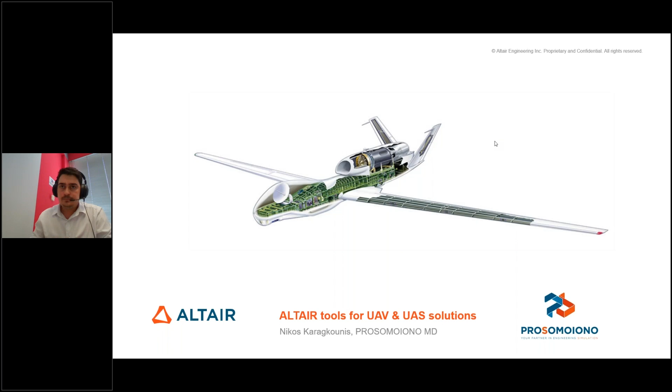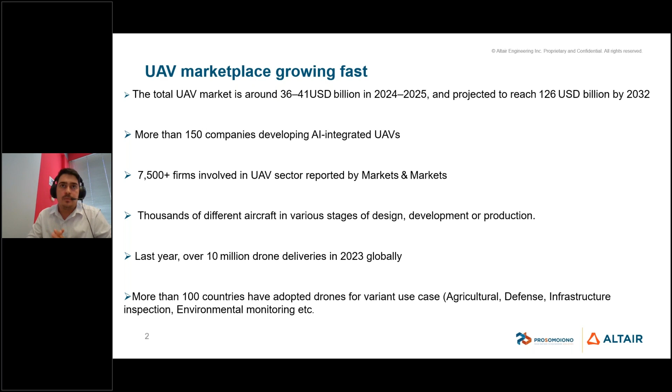Let's start with the bigger picture about the global UAV market, which is currently about 36 to 41 billion and forecasted to triple by 2032. Over 7,500 companies are operating in the field, with more than 150 focusing specifically on AI-driven systems. UAV technology is no longer confined to niche applications. Over 100 countries are now integrating drones across diverse sectors like agricultural, defense, infrastructure monitoring, environmental, and more. Last year, over 10 million drone deliveries were successfully completed worldwide. This isn't just a growing market, it's a market transforming at a scale and a speed.

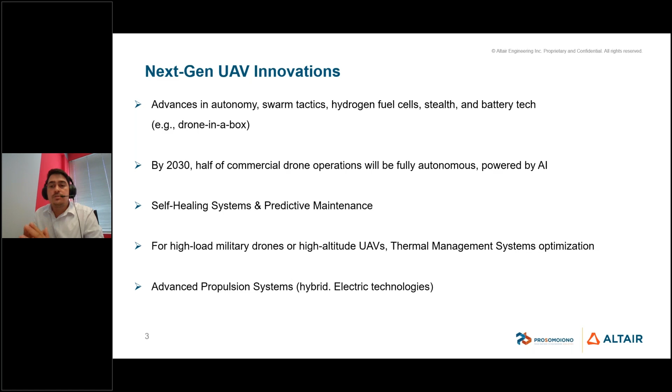The next generation UAVs are rapidly evolving with advanced technologies like hybrid propulsion, AI-based autonomy, and morphing airframes. This innovation introduces complex performance challenges that can only now be solved through sophisticated engineering simulation techniques. From fluid dynamics and thermal modeling to digital twins and swarm behavior prediction, simulation is now essential in the UAV development process.

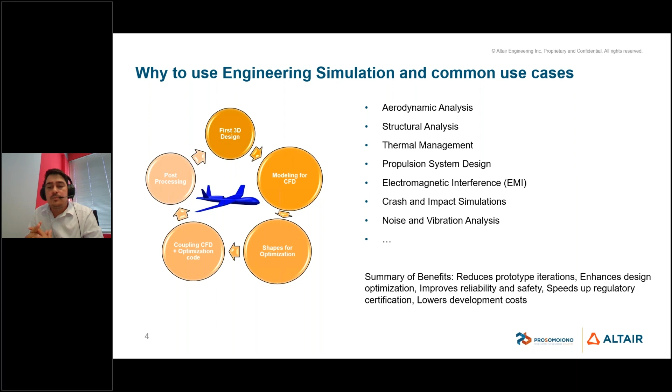This slide highlights how many use cases, pain points, and scenarios you can predict with the right engineering simulation tool to avoid failures and costs, and improve your products. But of course, simulation alone is not enough. What truly makes the difference is a robust engineering process, the right expertise, and the right technology partner like Altair and Prosomoiono who understand your business and guide your team in every step.

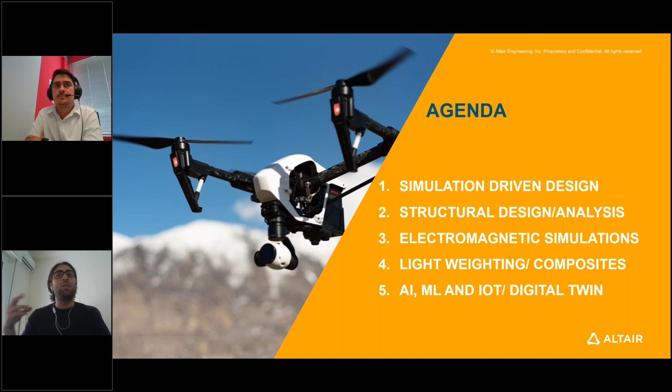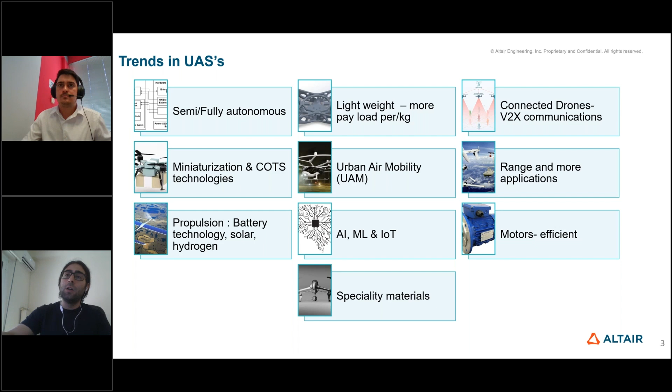On the other hand, all these systems are very complex and require advanced modeling in order to study them deeper. Versatility is another aspect that always has to be acknowledged, like when we want to increase the range of a drone, but we don't want to compromise our safety or the payload, another aspect of its performance. So, the role of simulation.

A common question is when to simulate and what to simulate. These four pillars, I believe, are the most appropriate ones. Design - we have to include simulation within the design process early on in the product life cycle, in order to get the information and know in which direction we have to go to make our product better. Then there is verification, of course. In this type of system, we have to follow rules and pass some tests, some validation cases.

Another important aspect is manufacturing, how we are going to build this product, how we're going to do the fabrication. Is it feasible? Is it sustainable? This is a very common issue that we don't see until the end of the design. And then there is, of course, operation, in which we see the performance of what we design, what we built, and simulation is a critical point as well for this stage.

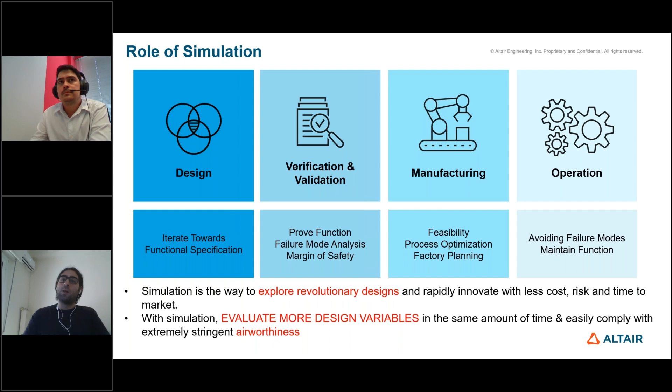Now, I talked about the design-driven simulation, where the typical design process includes the development concept and then the detailed design. This can be troublesome, prone to errors, and this is what Altair offers: the simulation-driven design. We have to do our optimization, our manufacturing, our structural analysis all together within the design process in order to speed up and to be more sustainable, in order to go to a prototype, validate it, and go to production.

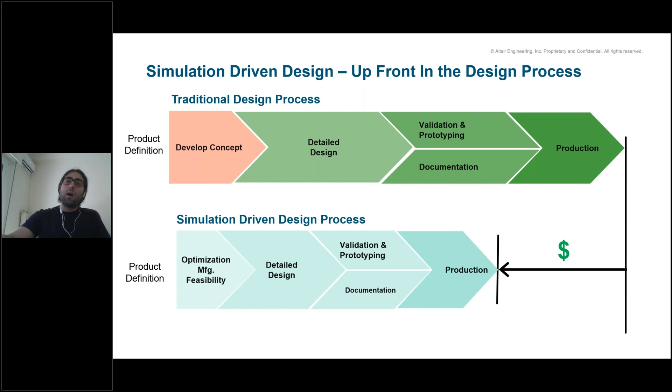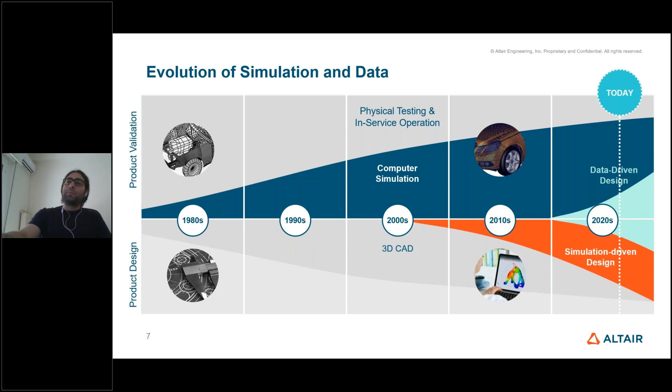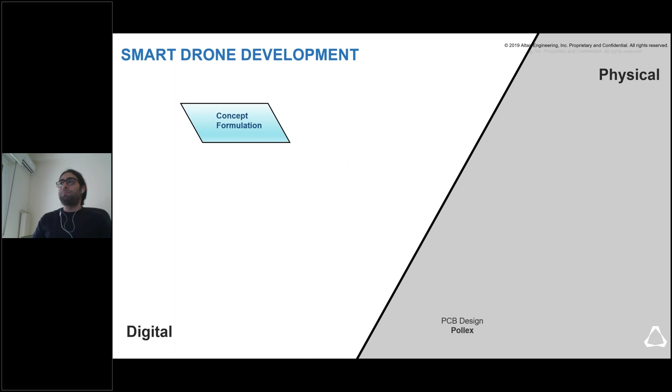Now, if we want to do an overview of how a smart drone development would look like, we have the physical space, and then we have the digital space, where we start from the concept formulation. We try our ideas, see what they go as, and then as a simulation-driven design, we include all the simulation, all the physics at this point in order to go to the detailed design.

As you can see, there are a lot of physics involved, a lot of software usually involved, but the goal is to achieve our aim, not how many tools we're going to use or how many physics are involved. Then after the detailed design comes the product release, the manufacturing, the validation of our product, some physical tests in order to see what we fabricated. And then there is the first feedback we get from what we designed to what we fabricated.

But the cycle doesn't have to stop at this point. We can go further, and until the end of life of this product, we have digital twins, we have hardware in the loop, simulation in the loop. There are a lot of other aspects to take into account.

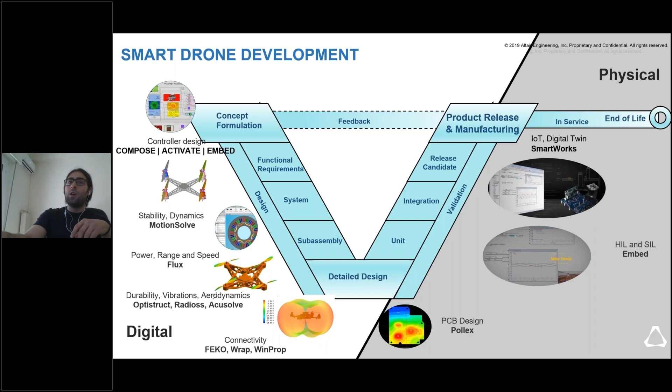Before we go deep into 3D modeling, structural analysis, CFD, hot topics, of course, we're doing some math, some system level simulation. For example, in this scenario, we have from electronic circuit to motor dynamics to multibody dynamics to some control systems in a schematic.

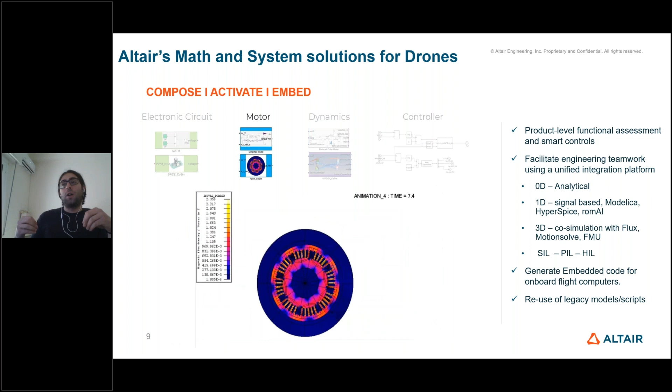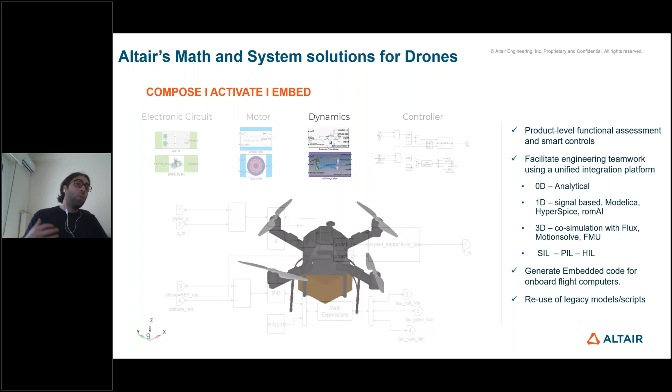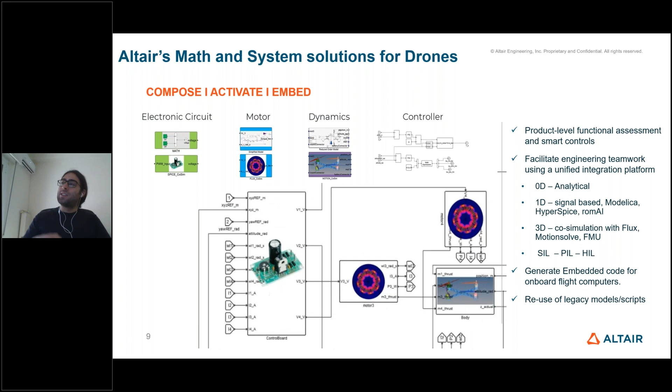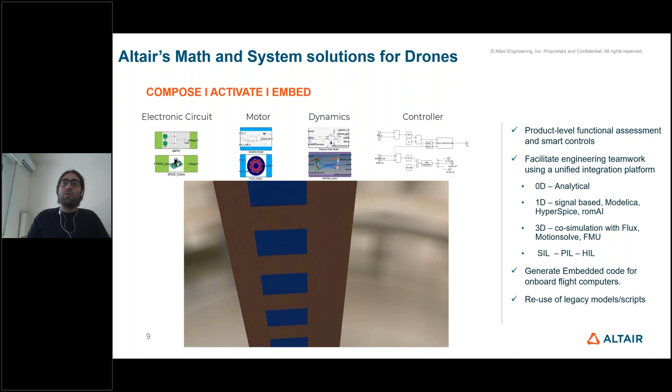All of this can be translated into a co-simulation within Altair in order to produce a scenario. In this case, the scenario, as we're going to see in the next seconds, is how a drone is going to deliver a package in an urban area, as we all heard about. This is a schematic behavior of what the co-simulation would look like, high fidelity models with low fidelity models all together, in order to do a scenario, in order to create our embedded code for flight simulation in this example.

In this type of topic, for example, we have Kappa Electronics, who, and I'm quoting its owner, were not so sure if and how they could do this simulation for their customers. Altair provided the appropriate tools in order to work seamlessly and create a quick and accurate simulation.

Now, structural design is a very common concept. We all heard about it. Some of us are doing it in our day-to-day work. It includes multibody dynamics, some thermal analysis in order to test the different electronic systems that we have in a very compact way within this type of technology that may have a temperature rise, some structural analysis, of course, in different parts, in order to go to a multi-physics simulation.

In order to test all of them together, not integrate results from one to another, which can cause some errors that we have seen in the past. Then there are some more niche simulations, but essential to how we construct, how we fabricate, what our goals are for our products, like impact analysis, drop test, some optimization, which is not to be neglected, DOEs, and how we are going to manufacture our product.

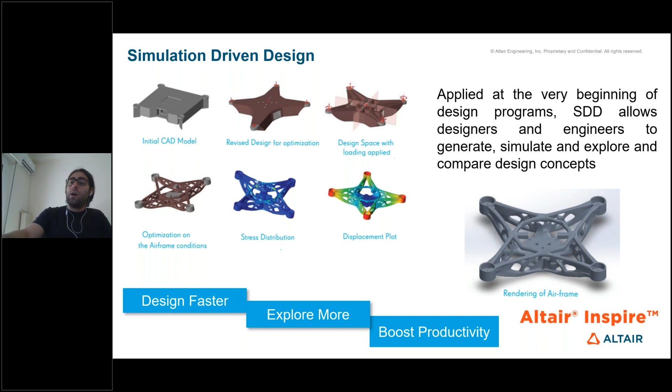Then there's CFD. This is also a very well-known simulation. We're going to see the aerodynamic behavior of a product, aeroacoustics, noise that has to do with some verifications, and thermal analysis, as I said before.

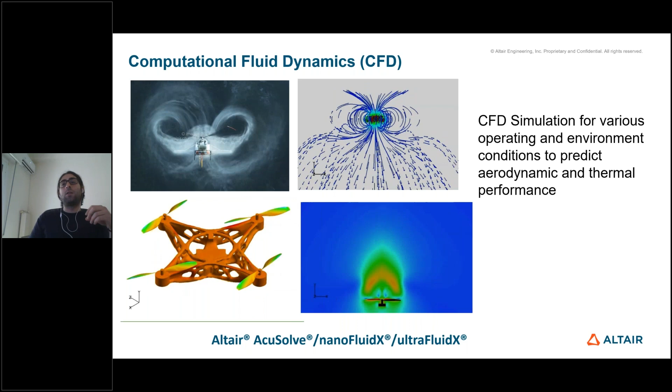All of these are high fidelity models in order to get our results, to get a deeper understanding of what we designed. A very common example of this for everyone, from the CFD standpoint, is how we're going to optimize our design.

A nose optimization we see on the right, or an engine inlet. We have to reduce the coefficient of drag, ensure lift is as it should be, and study turbulence in order to fully understand the phenomena. But this is a high fidelity model.

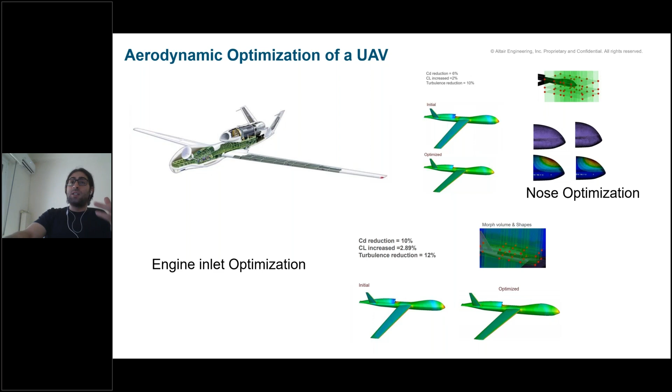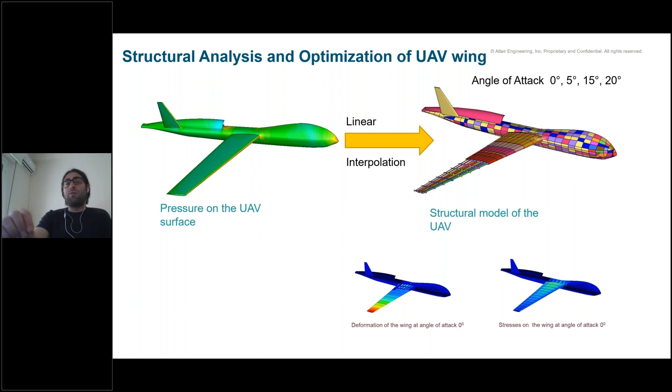I want you to think of this scenario where the structural team of your company owns just the stresses, just the pressures, to test some angles of attack in order to redesign or reconstruct something, and wants to know how it's affecting overall performance. A high fidelity model is not always preferred due to the fact that it's very time consuming. It needs some expertise, and of course it's necessary, but not always at all stages, all phases of our design.

In this example, we're going to see low fidelity models, high fidelity models, and mid fidelity models. As you may know, Euler codes, vortex lattices, RANS, LES, DNS - we have to choose the appropriate solver for our scenario. Here come panel methods.

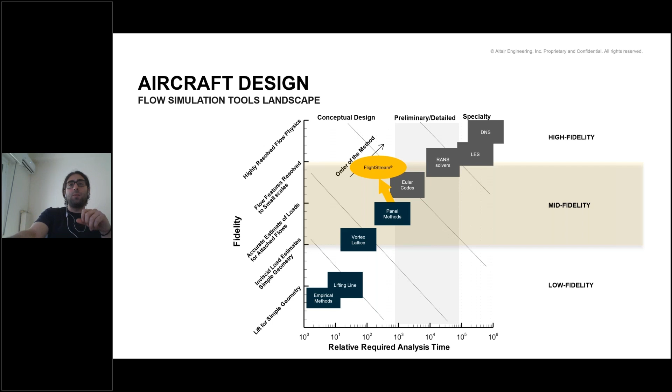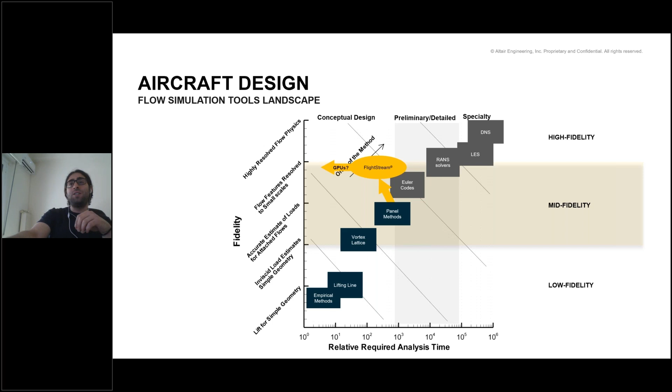Most of the time, this specific software, FlightStream, is extremely good for communication between the CFD and structural analysis teams in your company, due to the fact that it requires a very small amount of time without compromising the accuracy of our results.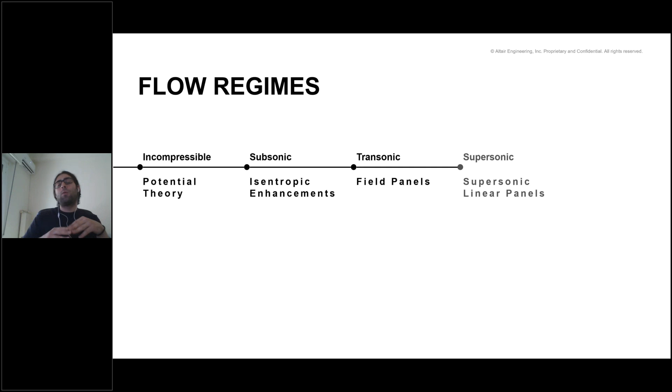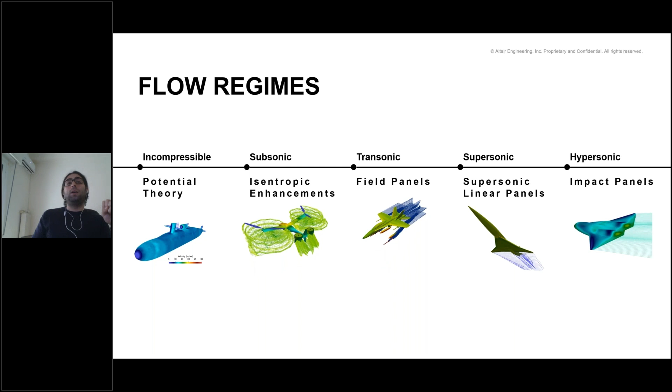The flow regimes span the entire spectrum - we have incompressible flows, subsonic, transonic, supersonic, even hypersonic in some cases. So I want you to feel that we don't always have to do a high fidelity model even before the detailed simulation. This is a well-known use case in academics, where we introduce mathematical models and try to avoid, sometimes, high fidelity, fully turbulent modeling.

Then we have crash, safety, and impact simulations. These are very essential in the destruction testing of our product, or the worst case scenario, let's say, where there's a drop test, head impact test, or bird impact test. These are niche simulations, but Altair has led the way in this field for many years with its specific software.

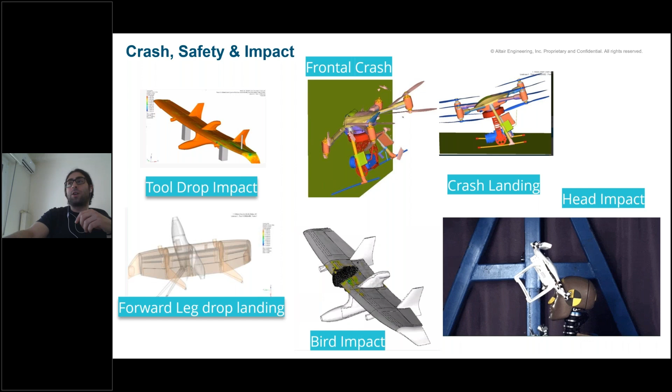Multi-body dynamics is also something not to neglect. Here we see phenomena like pitching, rolling, the movement of different parts of the system. This is essentially something that I believe has to be achieved in all tests, all prototypes, in order to see how we actually communicate with our product. Does it do something that we didn't intend? This is a very good approximation to do in a simulation environment, to know beforehand how it should affect our product.

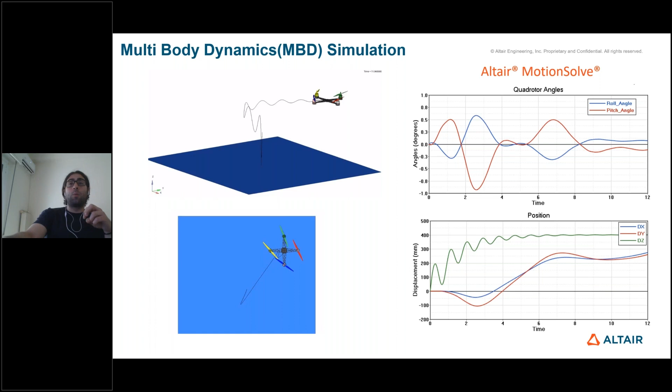Another example using multi-body dynamics is morphing of the wing. Here we see movements well known in wings, like pitching, rolling, yaw, maybe some plunge or surge. We have to understand, through mechanical parts like actuators, how to move our wing in order to reduce the power requirement or the fuel consumption.

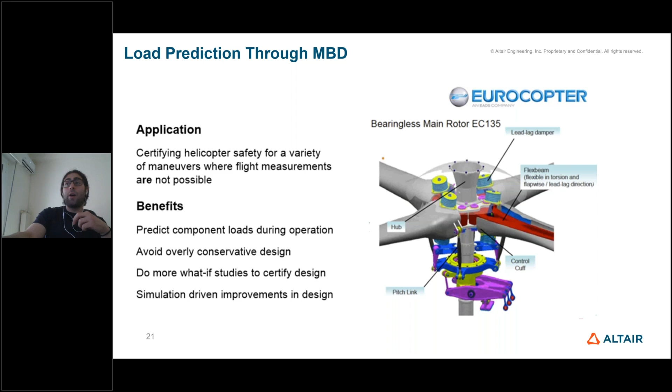This is also a very good approximation in order to know beforehand what we should do, what we should design. Here's another example of a Eurocopter where there was no space to get flight measurements, and of course it was necessary to go to what-if studies in simulation scenarios and improve our design.

Another hot topic is weight reduction, in order to get the payload we want at the end of the day.

Essentially, we use composites in this type of structures, and we have to not only use them but study them deeply. This specific case shows us that from Aeromorphology they achieved 50% weight reduction, which is a very good number to aim for, by doing some structural analysis, composite analysis within the same software, and then some DOEs in order to get the best of it.

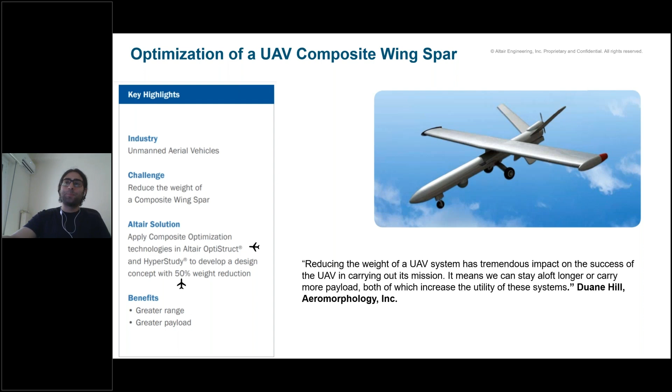So composite analysis, optimization - we want to reduce the weight, but we have some safety constraints, and we are also having some manufacturing constraints, like what would be the thickness or how we are going to stack the plies in order to be manufactured - the feasibility of this operation.

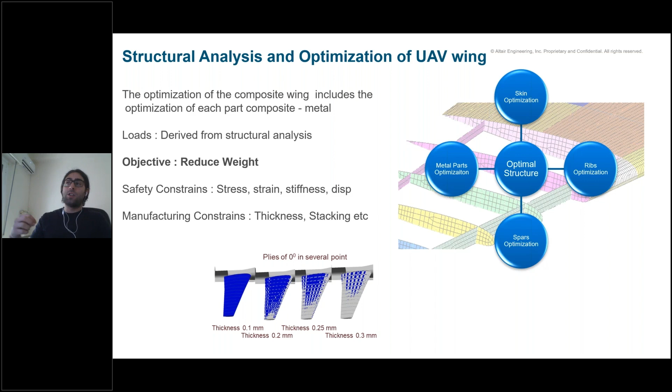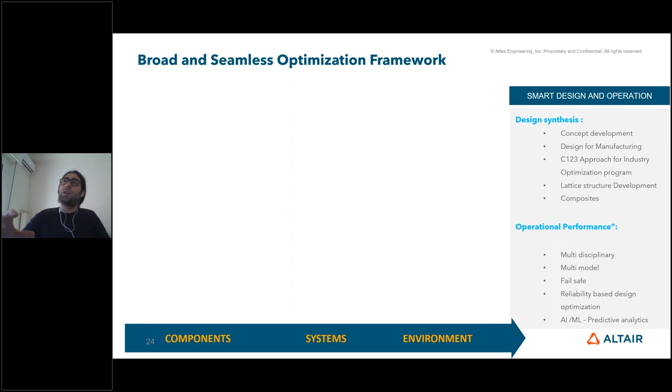As we are going to see in the next slide, Altair, as an industry leader in structural optimization, includes a broad framework for optimization. We start from the design concept, where when we are doing some topology, like we saw before, some lattice beams, we include manufacturing constraints - how we are going to fabricate our product, or a part of our product is going to be extrusion, is going to be form. These are all parameters included in our optimization framework.

Then we have, of course, lattice, if we want to do something more futuristic, gain some pros from this operation. Of course, topography optimization in order to understand the topography of what we designed, to see repetitions, to maximize the surface characteristics that we want to do.

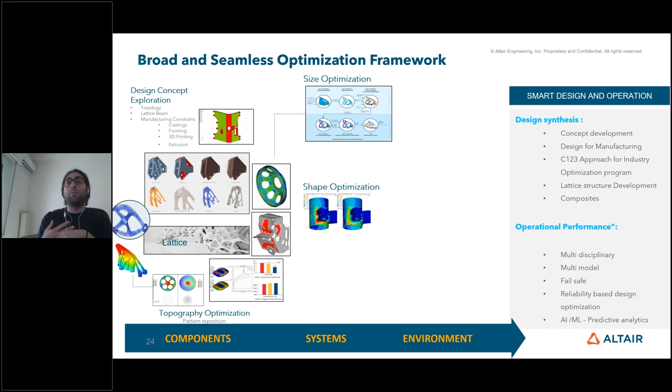Then there is shape optimization, a well-known optimization sector, let's just say. Size optimization - in this case, this photo is a very good example from Airbus, where we wanted to do a size optimization regarding the air duct frame to reduce the weight.

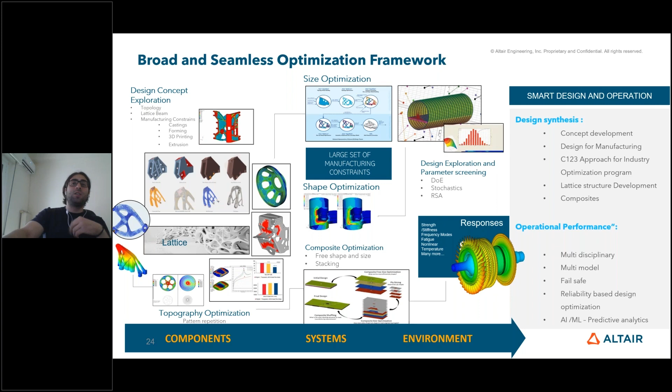And then there is composite optimization, where we have free shape, size, and stacking, as we're going to see in the next slide. But we don't stop there - we have DOEs, stochastic methods, in order to get the best of it, get a large set of manufacturing constraints, and see our responses. So composites - we're going to see in three phases how we are going to optimize it.

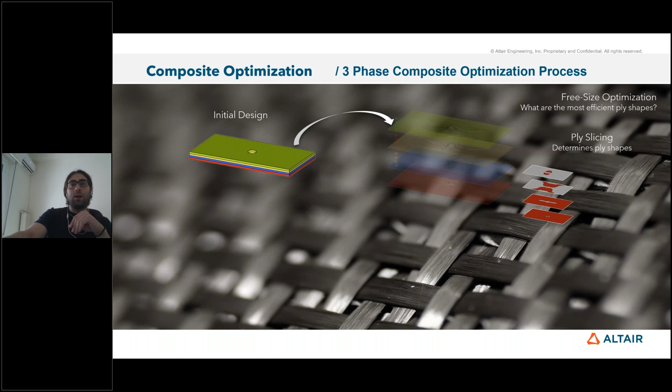We start with our initial design. We know we want a composite. We start with free size optimization - the most efficient way of ply shapes that we want to do. Here you can see a ply slicing in order to get a visual idea.

Then we have size optimization - how many plies in order to get the maximum thickness of the material and meet the engineering targets. This is also a very good video of how we are doing size optimization. We want to define its ply, its thickness, and then we move to shuffling, where it's the most crucial part, I believe, from my opinion.

How we are going to do the stacking in order to be manufactured, to be feasible for manufacturing. This is a good example of what different scenarios we can determine in order to get the idea of what's the best scenario to go with.

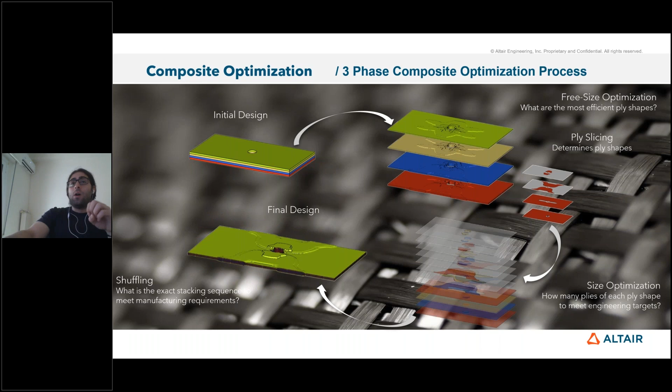I've said manufacturing a few times, and someone would say, what's he talking about? What does manufacturing have to do with simulation? Altair, as one of the few international vendors of simulation software, includes manufacturing solvers. We want to study, we want to simulate the process itself - casting, metal forming, extrusion, or 3D printing. These are all solvers, and not some fancy videos, in order to study the manufacturability itself.

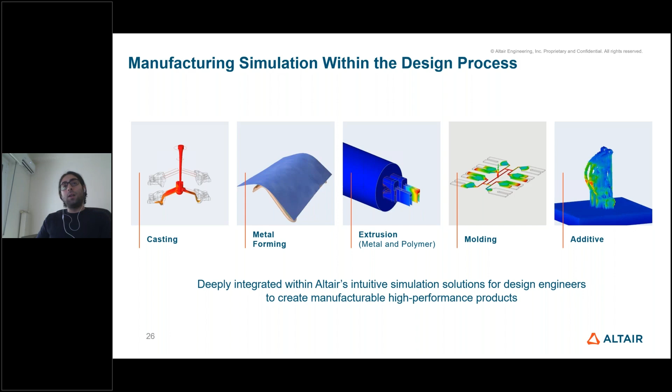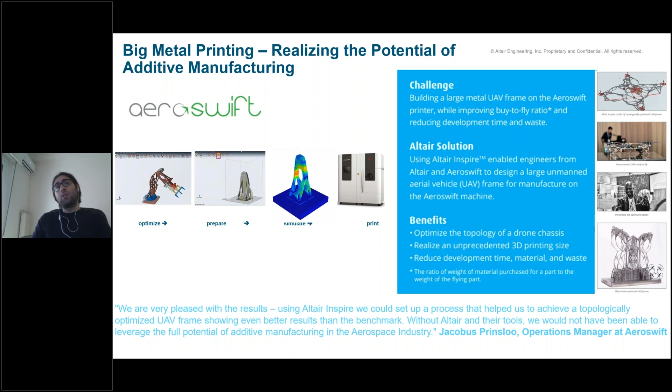Another aspect of simulation now - we have electromagnetics, a very common issue that can occur in our tests. Essentially, UAVs are flying RF systems. Everything has to do with control and detectability. So antenna placement, as you see, to reduce interference, to radio coverage or jamming, or how the signal goes in place. These are all very essential simulations that we can do and we have to do.

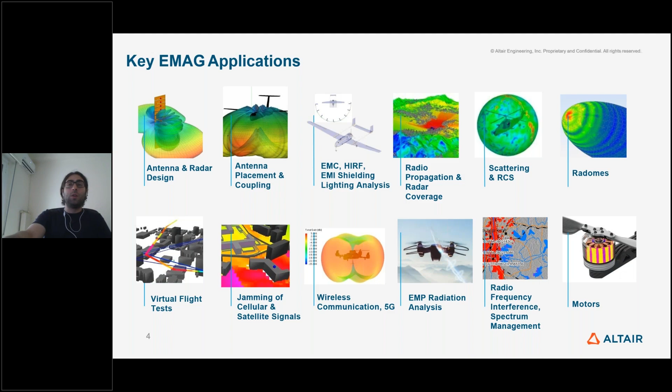Here are some more specific areas where we introduce some software like Flux for motors and sensors, FEKO for antenna placement, and WinProp for radio propagation for urban or mountainous environments. These all work seamlessly. This is a very interesting point to point out.

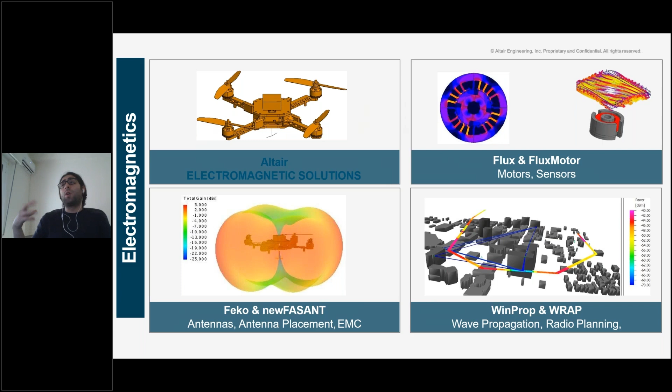And then we have our electronics from a PCB level. We want to reduce the PCB design iterations to get the best of signal, power integrity, thermal distribution. These are all within one software for you to test, to verify, and then to meet the manufacturing utilities of how to construct your PCB designs.

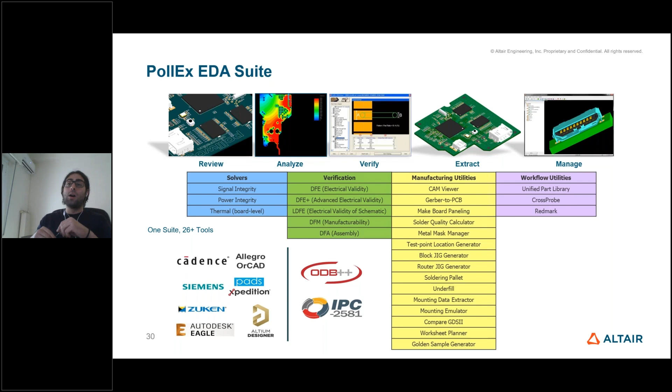Here we see a very good example of a camcopter with some very interesting numbers, like 50% of weight reduction, decreasing the time to manufacturing the product by 2 months, and of course time and cost savings from both time and material waste. In this customer story, there were used a lot of simulations, as you may see, like structural analysis, MotionSolve, CFD, and some other tools from Altair portfolio.

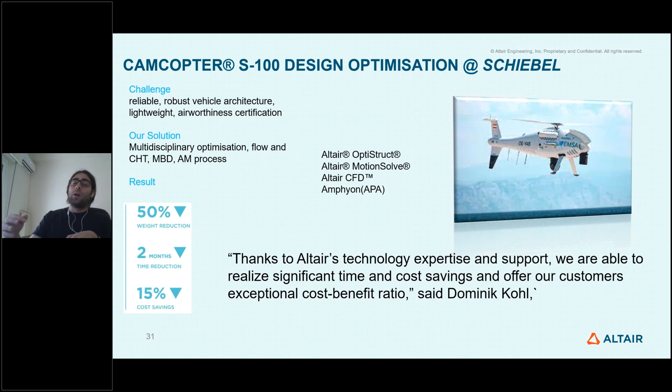Moving to AI, to machine learning, I won't go too deep, but it's nice to have an idea of what machine learning or AI has to do with our simulation, our products in this industry.

For example, we have some measurements from our design, from our prototype, and we want to include them in a Knowledge Studio workflow, create a machine learning model in order to get the progression of how the remaining useful life of our product could be, and test it, validate it with our actual data in order to train again the model and understand trends, some things that are not known to some engineers beforehand when they design the product.

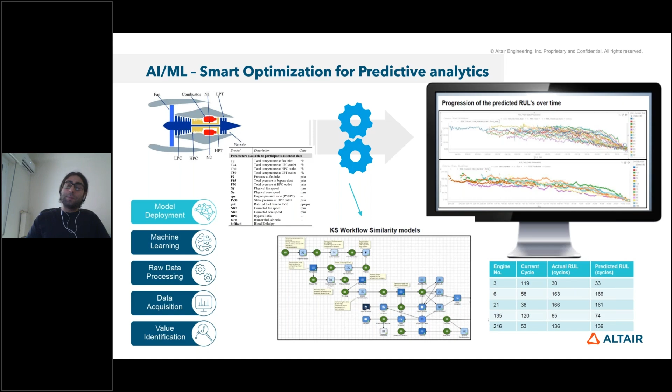In this manner, Altair has a specific platform for digital twins with optimized tools to do a specific workflow, but all together work seamlessly, like the data preparation, data modeling, how we visualize our data and results, how we are going to create the appropriate structure for importing our data. These are all together in what we call Altair RapidMiner tools, with some other extra tools from the simulation to work together.

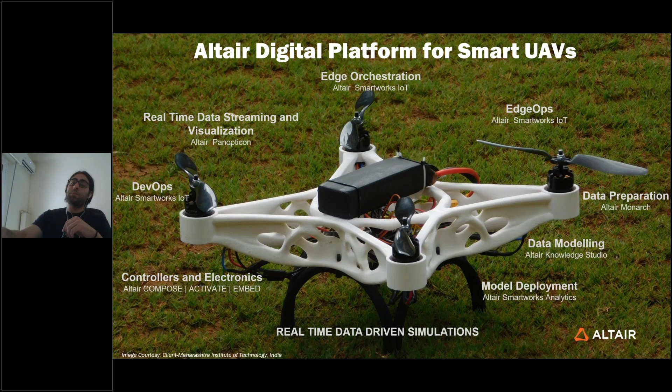So digital twin, this is also a very common term that we hear about for a lot of years now. We start from the digital prototype and we want to go to the physical one. This is the first time again where we can collect our data and evaluate them, import them in our design, and tell our engineers what went wrong or what was good about what we designed.

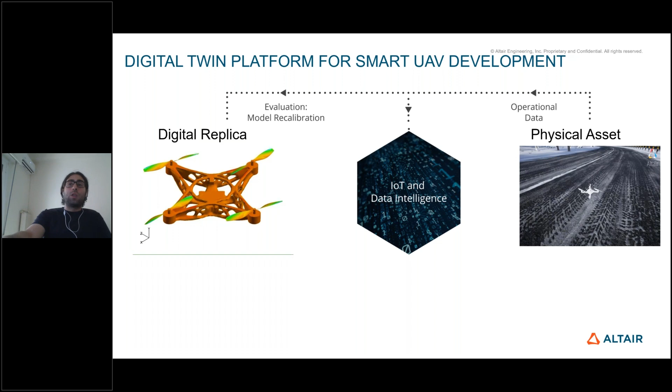But we don't have to stop there. We can continue. We can connect the two assets, the digital and the physical prototype, in order to increase the life of the product, to predict some maintenance. These are all data-driven simulation now, with respect to what we collect, what our experience tells us, all of them in a scientific manner.